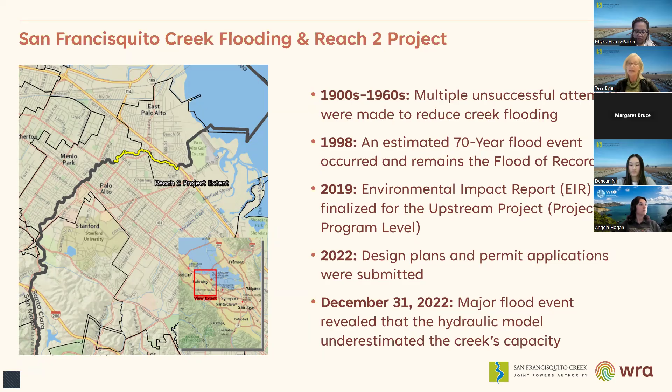And then December 31st, we had this major flood that realized that the hydraulic model, which was the basis of our design, underestimated the creek's capacity. So the graphic is just showing you a little bit about what the Reach 2 is.

So what does a 7,200 CFS flood do? It floods the creek. And it's really clear from this graphic that the pinch points are around the Pope Chaucer Bridge. It is the area of least capacity in the creek. So when floods happen, it squeezes out at Pope Chaucer Bridge. And depending on the storm, because all storms are different, the one that we had in 2022, the creek was already bank full, and we found out that the water squeezed out in many different areas.

So these are just a listing of the overtopping locations, which many of you are probably familiar with. And then the shading of the pink is related to how deep it is. And in some areas, the water can be as deep as 3 feet and far away from where it originally comes out of the creek. And many of you may know, but the creek has these natural levees. So once the water leaves the creek, it does not go back in.

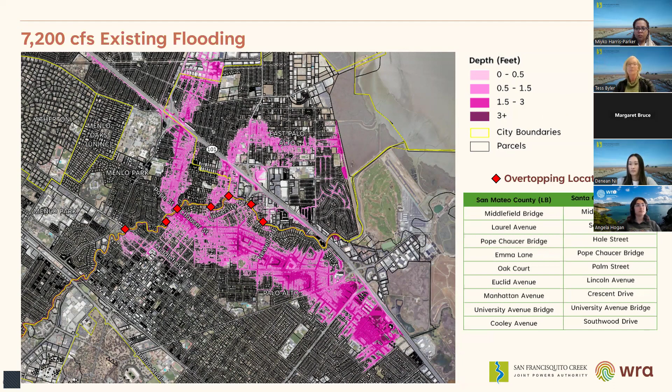So our project design goals, these were reaffirmed by our board in January 2025, and they are essentially the same goals that were in the 2019 EIR. And so it's protect life, property, and infrastructure from floodwaters exiting the creek for flows up to 7,200 cubic feet per second, while minimizing impacts of the project on the adjacent communities and the environment.

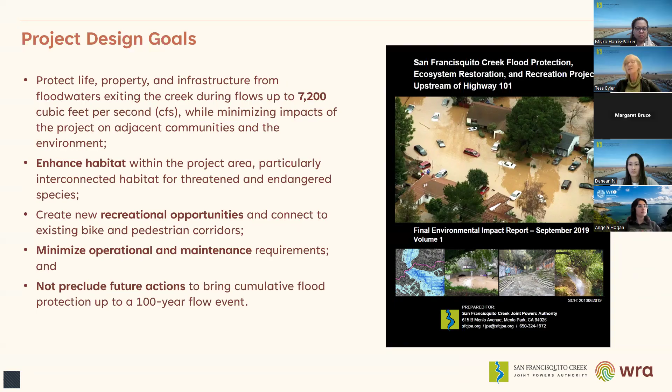Enhance habitat within the project area, particularly interconnected habitat for threatened and endangered species which occur in the creek. Create new recreational opportunities and connect to existing bike and pedestrian corridors. And then minimize operational and maintenance requirements. And then the last one is to not preclude future actions, because this project is not a 100-year flood protection project. It is only designed for an approximate 70-year event, which is the same thing as the 1998 flood of record.

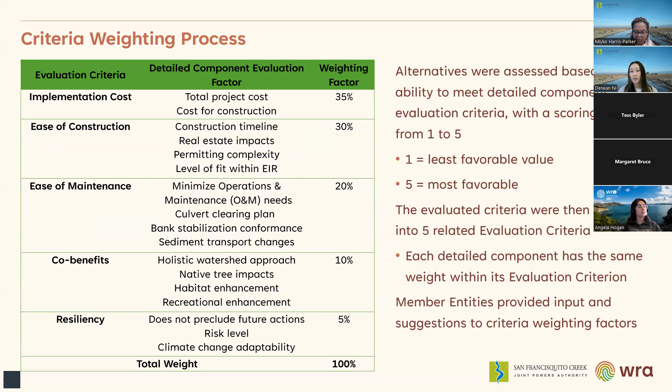We got input from our member entities on the weighting factors of all of these evaluation criteria groups, but we'd also want your feedback after this community meeting so that you could weigh in on these weighting factors and let us know what's important for you. So these are the 6 near-term actions that WRA identified, and I will go into some detail about each of these actions in a little bit.

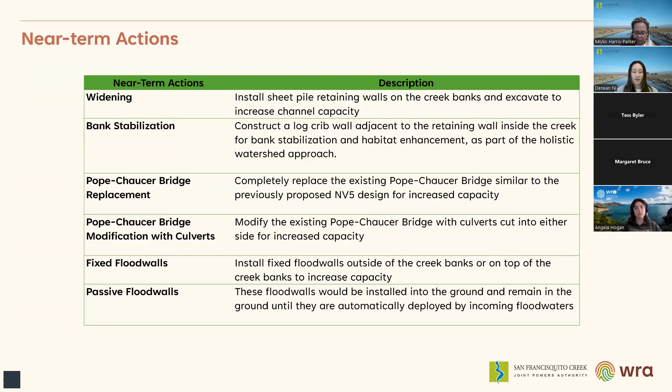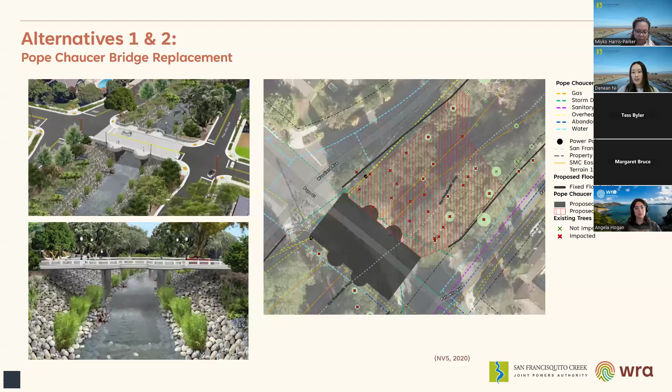So here's an overview of the 4 alternatives that WRA talked about in the report. All of these alternatives include one action at Pope Chaucer Bridge, channel widening, and flood walls all throughout the creek. The main differentiating factors between these alternatives is what we do at Pope Chaucer Bridge and the extent of the widening. So in alternatives 1 and 2, we have a complete replacement of the bridge, which would open up the channel fully underneath. This is based on the design by NV5 that was completed in 2020.

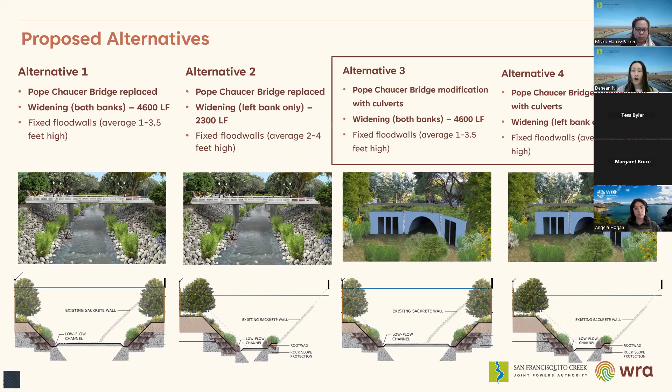Next, alternatives 3 and 4 looked at a bridge modification with culverts. In this option, we would construct 5 new culverts on the wing walls of the Pope Chaucer Bridge, and this would retain the existing Pope Chaucer Bridge structure. There will be 3 culverts on one side that are 11 by 18 feet. The other side are 9 by 18 feet.

Originally, we were looking at this alternative because we thought it would preserve the park-like feature that's at Pope Chaucer Bridge, but afterwards we realized for cost and due to complexity, due to the structure's age, that would not be possible. And also, constructing the new culverts does add complexities, including sediment buildup and debris buildup.

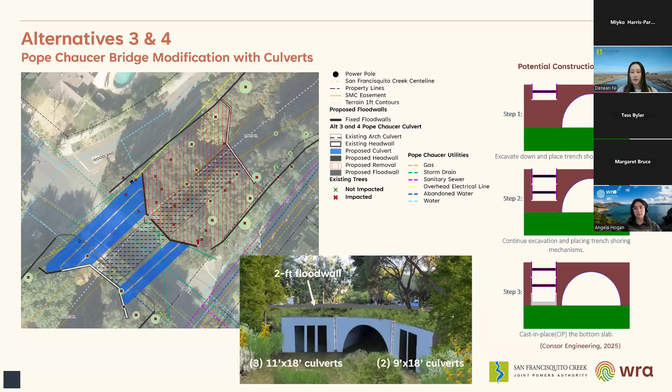And so I'm sure a lot of you have noticed the one big action that we've proposed in the report are flood walls. These flood walls extend all throughout the creek, including upstream of Pope Chaucer Bridge, as well as around Middlefield Road Bridge. Flood walls are needed to reach the design capacity of 7,800 CFS. The average height of all of these flood walls would rise around 3 feet above the road grade. And at the top of bank, the range of these flood walls would be between 2 and 5 feet.

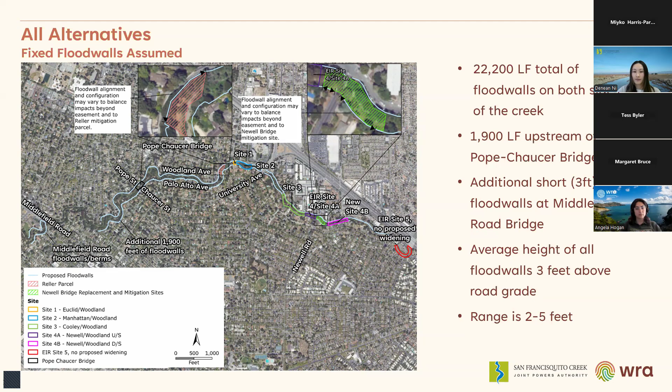So in all the alternatives, we also proposed channel widening. In alternatives 1 and 3, we would widen on both sides of the creek, which is around 4,600 linear feet. Alternatives 2 and 4 would be just on one side of the creek, so around 2,300 linear feet. We would excavate the creek to widen the creek width and install retaining walls. These retaining walls would require tiebacks due to the size. We expect that these tiebacks would require up to 60 feet of easement, which is a very conservative estimate.

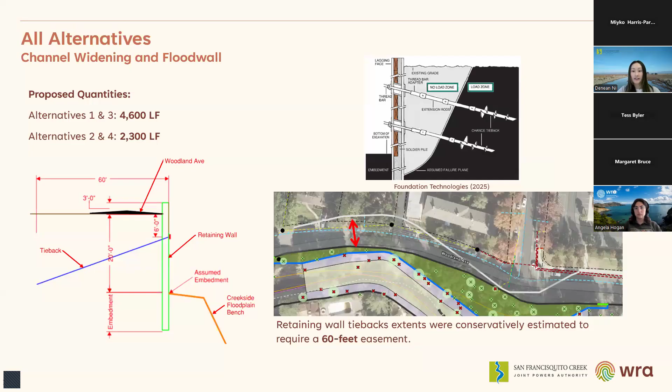In addition to channel widening, we've also proposed log crib walls for bank stabilization in the widening areas. In the alternatives where we widen on both sides of the creek, we would construct log crib walls on both sides. Where we widen on just one side of the creek, we would have the big log crib wall on the side where we widen, and also a small log crib wall on the other side of the bank, where we would not widen. This log crib wall would provide additional stability for the widening areas, and would also provide habitat enhancement and refugia for fish.

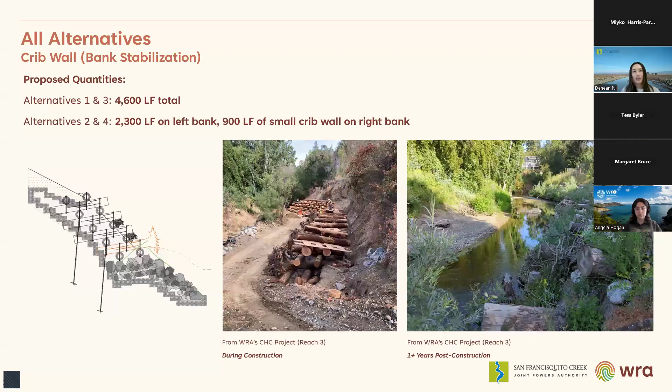So in the report, we talk about different types of flood walls. Here are just some examples of the ones we talked about. We have your traditional fixed flood wall, and here's an example of one that we've installed down in Reach 1. And another example is the architecturally finished flood walls at Coyote Creek. We want to show you this picture because we want to share that although we are installing flood walls, there are ways to make the flood walls more aesthetically pleasing and match with the rest of the area.

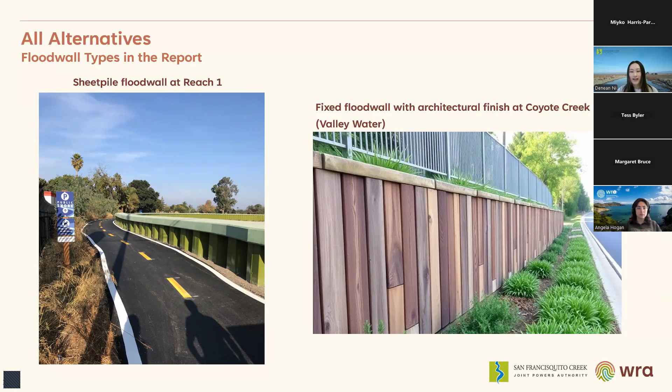And in addition to traditional fixed flood walls, we also looked at passive flood walls and glass flood walls. The two types of passive flood walls we looked at were horizontal flood walls and vertical. These are different just in the way they lie in the ground, but passive flood walls in general would lie in the ground and remain hidden until they are automatically deployed by incoming water. With glass flood walls, they are fixed, but the upper portion would be glass, and it will help preserve the natural views of the creek and also improve visibility in tight areas where flood walls are necessary, such as along Woodland Avenue.

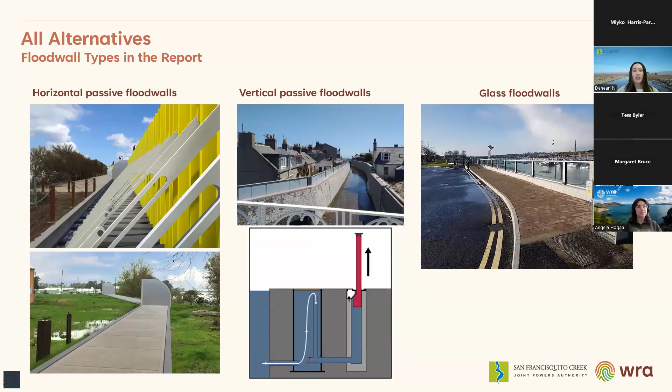And very quickly, these are the 5 future actions that WRA have identified in the report. The first one is offline detention using upstream detention basins in Reach 3. The second is a modification to the Stanford Searsville Reservoir project. We expect that this project would be able to retain peak flows of up to 800 cubic feet per second. And these two actions, offline detention and the Searsville project, are vetted actions, which means that they've been studied in the past and have been shown to be applicable to reducing flood risk in the creek.

The other 3 actions are non-vetted, which means they require further analysis to determine whether they are feasible in our creek. First is to modify bridges such as Middlefield, University, or the private pedestrian bridges. These bridges are constrictions in the creek, and being able to remove them would provide additional flood risk reduction. One other option is flow diversion, where we would connect excess flood flows to existing or proposed storm drains or tunnels. There's one option where we looked at diverting flows to Atherton Channel or Matadero Creek. And lastly, we looked at attenuating peak flows, which acts similarly to peak flow reduction. This would be adding large woody debris in the upstream portions of the creek that have capacity and retaining the water there.

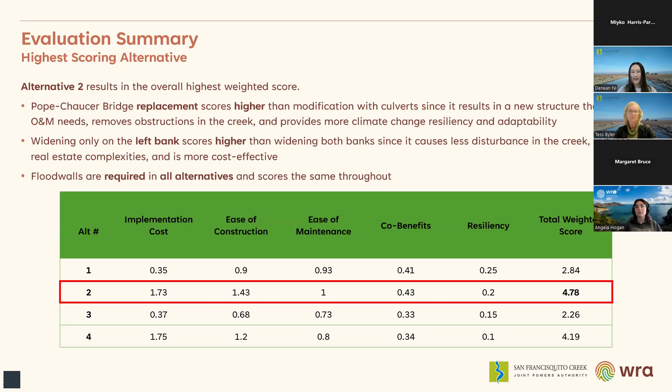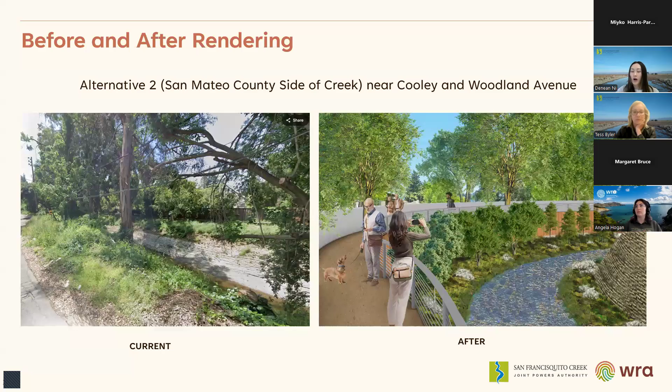So really, just as we've figured out, and Margaret said it before, no single action is going to be able to meet that design goal of 7,200. So we're proposing actions in a phased manner, and each action would have an incremental increase in channel capacity. And so, to avoid undue transfer of risk to communities downstream, we are going to be working as we did in Reach 1, from downstream to upstream.

And as Deneen mentioned, this feasibility level cost estimate is 120 to 170 million. And these are just listing some of the actions and what you might get. So with widening, you improve it to about 6,000. The flood walls would get you 7,200, as well as Pope Chaucer. And then Reach 3 upstream detention is not really additional capacity, but it's holding it back, and that's the way it's shown on this graphic.

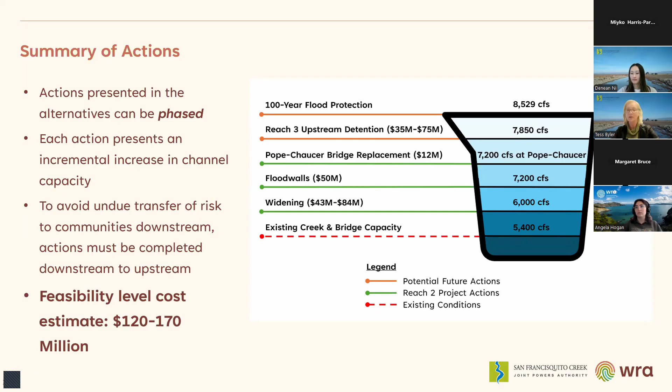So the one thing we learned in the middle of this project was that in the draft report that our member agencies reviewed, there is remaining risk once we implemented all these actions from Pope Chaucer on. There's residual risk from flooding that backs up at the Middlefield Road Bridge. So as has been mentioned, our EIR really did include the upstream area, but it was at a programmatic level.

WRA and I went out in early April and performed a hand survey that indicated that the model elevations were correct. So in this particular area, we really want to figure out what the issues are. So in the current report, in every alternative, WRA added flood walls up to 3 feet around the Middlefield Road Bridge to address this overtopping.

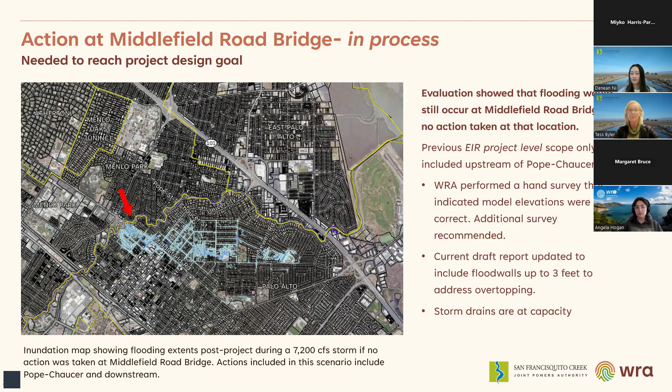And we commissioned Schaaf and Wheeler to take a look at the storm drains on the Palo Alto side of the creek, and we got those results at the board meeting: the storm drains are at capacity, and you do not get any additional benefit from the storm drains because they're tapped out already. So this last part, there's actually 2 more parts, but these are just our recommendations based on the report that's been developed.

So the first one, we would be asking our board to make a decision on this. When we looked at replacing the Pope Chaucer Bridge or retrofitting it, we initially were very optimistic that we could keep the park-like feature, but none of those things happened. So it was a con. We're able to keep the existing structure and maybe the visual look of the bridge, but we would lose that park-like feature. And second, the bridge was built in the 40s, so it's close to the end of its service life. So that was on the pro.

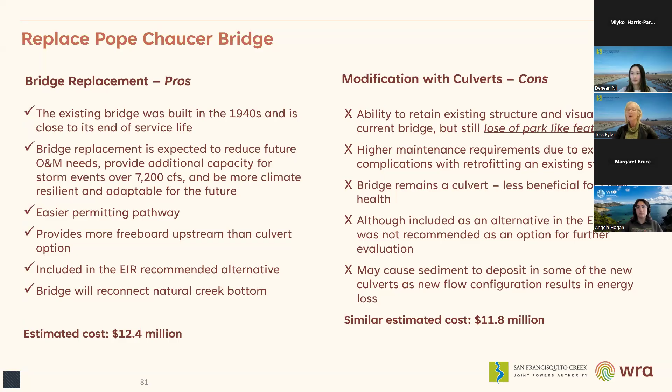And when we went through everything, the bridge replacement is expected to reduce future O&M needs. The culvert would have backup debris and brush in it and would need a lot more O&M, and it would remain a culvert, so it would not have a natural creek bottom. The new bridge has a natural creek bottom. It was included as an alternative in the EIR, but it wasn't recommended. We looked at it again, and now we feel like we've buttoned that up, and we will be recommending to our board to replace the Pope Chaucer Bridge. And finally, the cost on both was about the same, about 12 million each.

So that was that. In channel widening, the options looked at in the report were widening on both banks or widening on one bank only. And what we decided is that we would like to move forward with widening at the EIR sites 1 through 4 as optimized with the certified model from the Army Corps of Engineers. It could be on the left bank or the right bank, whatever makes the best sense for the creek, considering all of the criteria that we're evaluating things against.

And very definitely, widening the creek provides diminishing returns. So it does not make sense to just widen it as much as possible. First of all, you can't get the capacity that we need. Secondly, it's very expensive and there are diminishing returns. And it's probably obvious to everybody, but removing man-made constrictions in the creek and widening at known pinch points is really a no regrets action that we are recommending moving forward with.

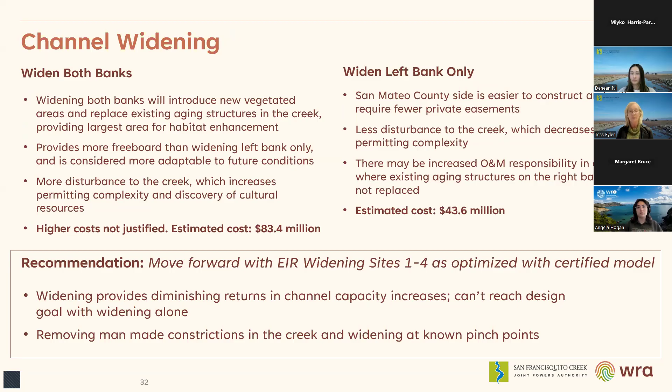So here are our recommendations, and we've broken them out into phases. The first thing is this alternatives evaluation report, which we're estimating would be finalized about September 2025. We would be confirming the draft evaluation using the Army Corps of Engineers certified model. And second, we would conclude any evaluations of other potential bypass stormwater actions before this report is finalized.

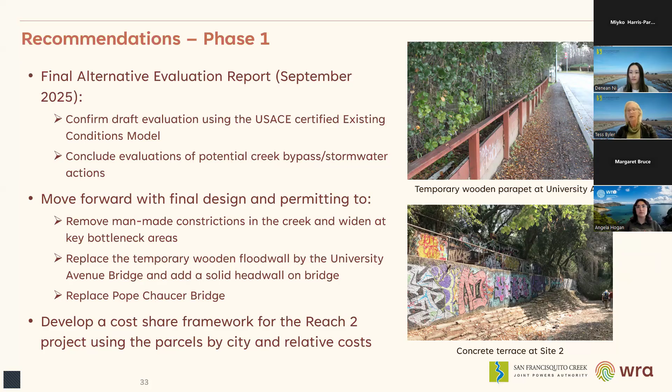The next thing is we would move forward with final design and permitting to remove those man-made constrictions in the creek and widen at key bottlenecks, replace that temporary wooden flood wall that you see at the top of the picture, and replace the Pope Chaucer Bridge. These were all elements of the draft permit applications, and we would move forward to permit these items. And the third big thing we can get out of this report, based on the parcels that would be protected, is that it allows our board to develop a cost share framework for the Reach 2 project based on the parcels by city.

And then this is our phase 2, which we would bid and award the work to remove these man-made constrictions, widen and stabilize the banks, and achieve additional capacity in the creek. And this would happen after the Newell Road Bridge replacement project is complete, estimated 2027. But that project has been bid and it's going to be under construction this next year.

Then we would move forward with project's elements after widening. So we would replace the Pope Chaucer Bridge concurrently with selected flood risk reduction option, estimated 2028-29. We would construct actions at the Middlefield Road Bridge area. And so, for example, if a non-structural action is possible, like raising the curbs from 4 inches to 6 inches or a foot, or the small flood walls that were determined to be sufficient, we think we can handle that.

And then the last thing is we would continue to evaluate additional flood protection elements for the 100-year flood event, because we realize that many people still have the burden of flood insurance, and we would still continue to evaluate this option. But as I've said, this project would not get anybody out of flood insurance. It's a 70-year project. And then the pictures are just showing evaluation of the storm drain capacity, which is one of the things we want to look at.

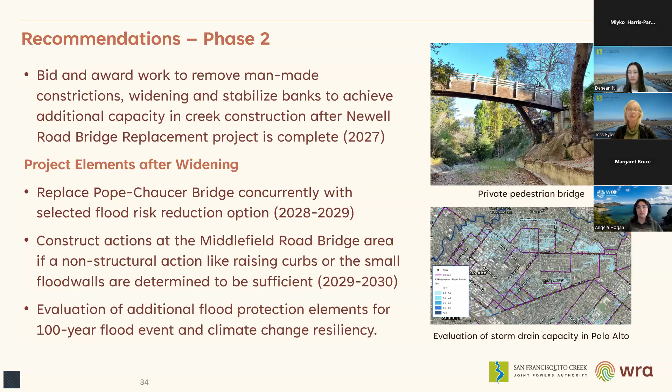And then one of the things that we learned in this report is these private pedestrian bridges can create a little bit of a backwater as well as do the other bridges. And so these would be future actions that would layer on additional protection. And then just some of the constraints and limitations of this. Margaret's already talked about the fully developed urbanized floodplains. Houses and businesses are there. There's all kinds of infrastructure in it.

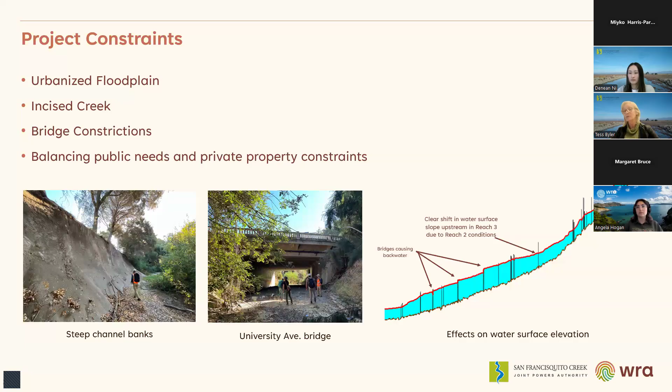The creek itself is incised. And we've talked a little bit about the bridge constrictions that back up water. And then, of course, we have to balance the public need for flood risk reduction and private property constraints. And then, of course, there's always data limitations. Some of the survey data, as we talked about by Middlefield Road, does not match, and we've got some questions on elevation. Hydraulic modeling itself has uncertainties, and the USACE technical review is underway, and it's intrinsically uncertain.

So to account for some of this uncertainty, we are adding a factor of safety, which we call freeboard, into all of the evaluations. And then finally, sediment transport. We know that there's a project that's proposed upstream. We don't have a detailed sediment model, but we've been working with Stanford University, and we will be figuring out different runs using their sediment model. Although WRA has included a qualitative assessment, and they'll have a more formal analysis during the design phase.

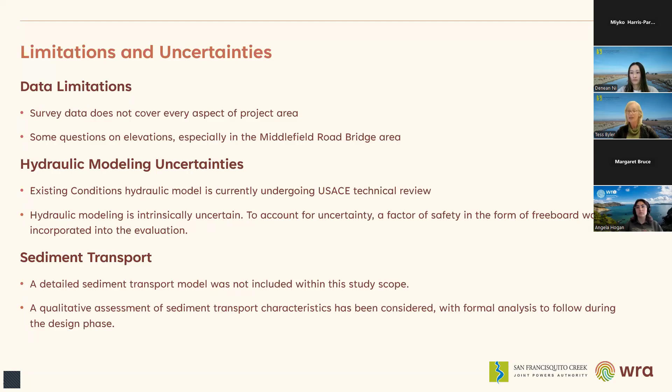And so with that, we want to hear from you. I think I've seen a couple of questions already in the Q&A box. I see two in there, and one that's been answered. So John Henley's got a question about what success cases in California can we point to where flood walls interacted well with both unhoused populations and local homeowners.

I don't know exactly what this question's asking, but what I understood from some of the comments previously is residents are worried that the flood walls would cause a barrier and increase homelessness in the creek. And we know from the Napa example that when you increase recreational trails, there's a decreased amount of homeless in the creek. Margaret, do you have something else to say there? I was just going to chime in on that example. We understand that it's important, and we can look for some other case studies in case there is other informative information out there. I think it's an important point.